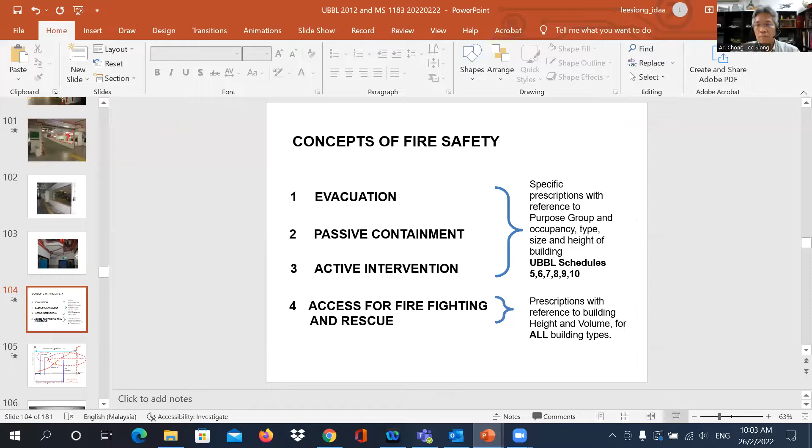Just to recap, when we did part one, we went through the four aspects of fire safety, namely evacuation, passive containment, and the third and the fourth aspect of fire safety on the basic concepts, which is active intervention and access for firefighting and rescue.

Again, to recap, we are referring to the UBBL, the Uniform Building Bylaws, as a basis for the contents of this seminar. I've always have to reiterate that the Uniform Building Bylaws, for all intents and purposes, is just a set of laws. It is not a document specifically written as a guiding document or as an educational document for us to use as a basis to figure out or learn how to design for fire safety. It is, for all intents and purposes, just a set of laws. It's called the bylaws. It's gazetted by the Act of Parliament, which means that if you don't do it according to the law, you're actually breaking the law. It's a criminal thing.

But having said that, it is near impossible for us to apply the laws if we do not know the fundamental reasons on how all the concepts, principles, figures and dimensions prescribed in the bylaw came about.

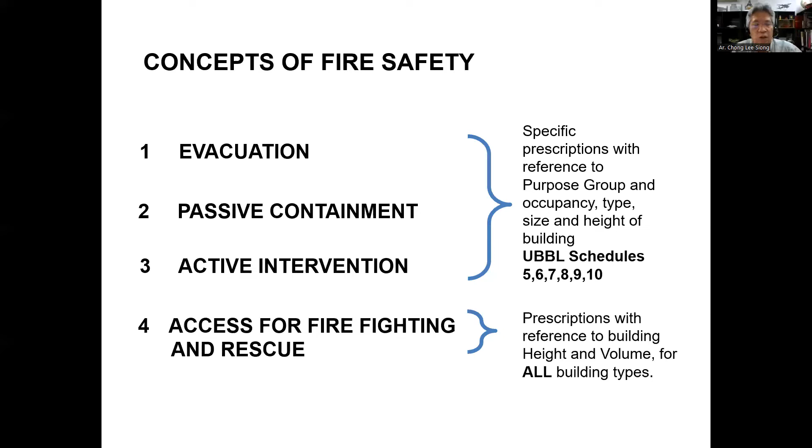So regardless of whether you're doing a residential or commercial building, just by reference to height and volume, the prescriptions for designing access for firefighting and rescue are the same for all building types, as opposed to the very specific prescriptions for different purpose groups and building types for evacuation, passive containment, and active intervention.

Again, to recap, when we're designing for fire safety, we have to first understand the nature of fire. As Sun Tzu said in the Art of War, in order to fight the war and fight your enemy, you must first know your enemy. So let's recap what the nature of fire is.

We've described this in part 1: fire starts with ignition, then you reach the condition known as untenable condition. This short time between ignition and when conditions become untenable is known as the available safe egress time. Conditions usually become untenable when the smoke layer comes down. So it's a very short period between ignition and untenable conditions—even well before the fire reaches full-blown flashover status, untenable conditions are reached very early.

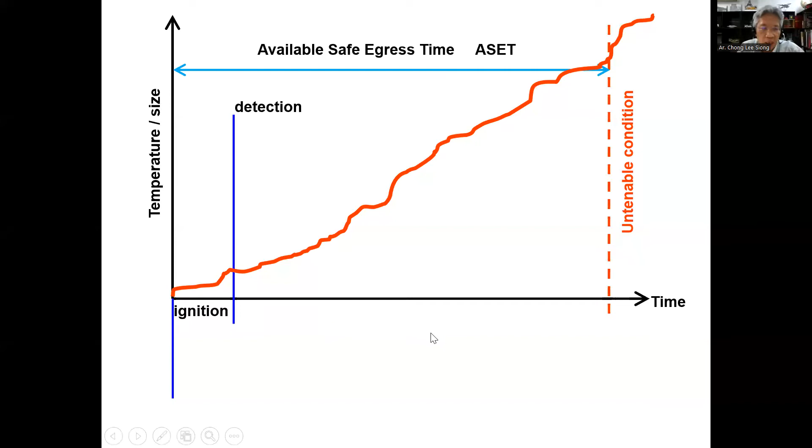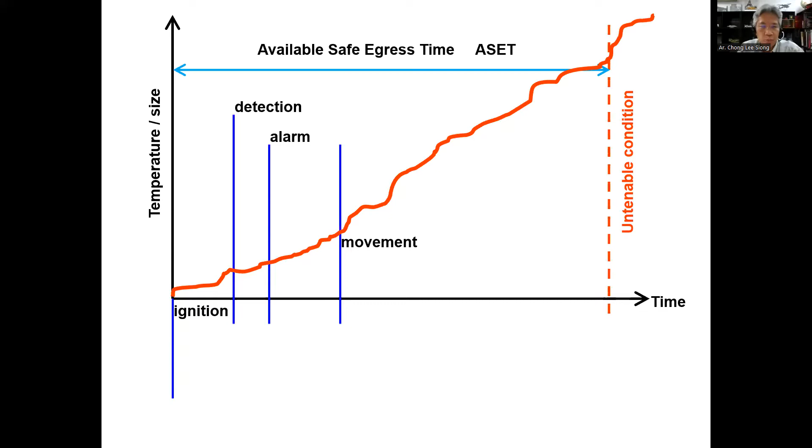In part 1 we also investigated the time delay taken for detection of the initial fire, the raising of the alarm, and the delay to actual recognition that it is a fire, leading to people starting to move and evacuate, and then total evacuation. The time taken from ignition of the fire to total evacuation of people is known as the required safe egress time.

We've also understood the factor of safety for design purposes is 0.75 of the ASET. So if you've got the available safe egress time from ignition to untenable conditions, you have to design the building to allow for total evacuation—detection, alarm, movement, and evacuation—within a required safe egress time, which should ideally be less than three-quarters of the available safe egress time.

Now coming to active equipment and active intervention, we are really looking first at detection and alarm—what mechanical and active systems allow us to facilitate or assist in detecting the fire and raising the alarm. Then the rest of it will be on active containment and extinguishment.

If you recall, the first three principles of designing for fire safety: the first is evacuation—design for evacuation, first priority is to evacuate the occupants. The second priority is to contain the fire in one location at one time. Thereafter comes active extinguishment and access for firefighting and rescue. So these two parts—detection and alarm, and active containment and extinguishment—are very, very important.

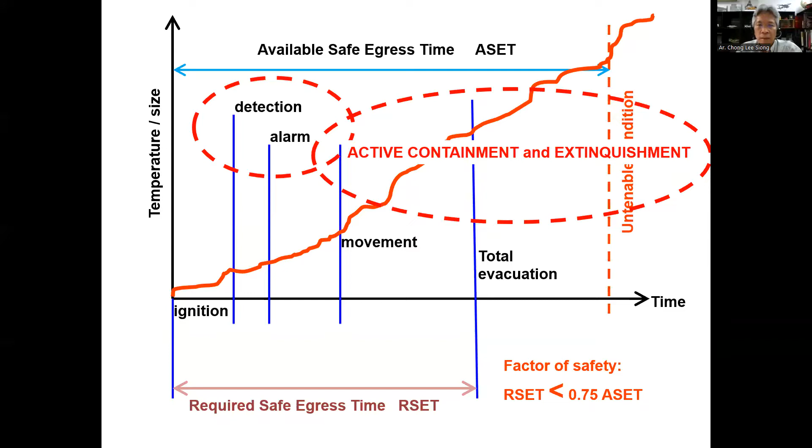I'll show this video again. We have seen this when we did part 1.

To recap, this is a recreation of a room from a nightclub fire somewhere in the US, many years ago. This nightclub fire was famous because it had a live performance, and all the revelers were packed into the nightclub. I think about 300 or 400 people were packed into a very small space. The live performance used pyrotechnics, and when the pyrotechnics went off as part of the performance, the fire started. When the fire started, a lot of people still thought it was part of the performance, since they were using pyrotechnics.

So when the ceiling started to catch fire, a lot of people thought that was part of the performance - wow, fantastic, a live performance with fire. Then the situation got bad very quickly. When people tried to evacuate the building, the bouncers at the gates were locking them to prevent people from leaving because they hadn't paid for their drinks. It was a disaster, really a very fatal situation. Not very good at all.

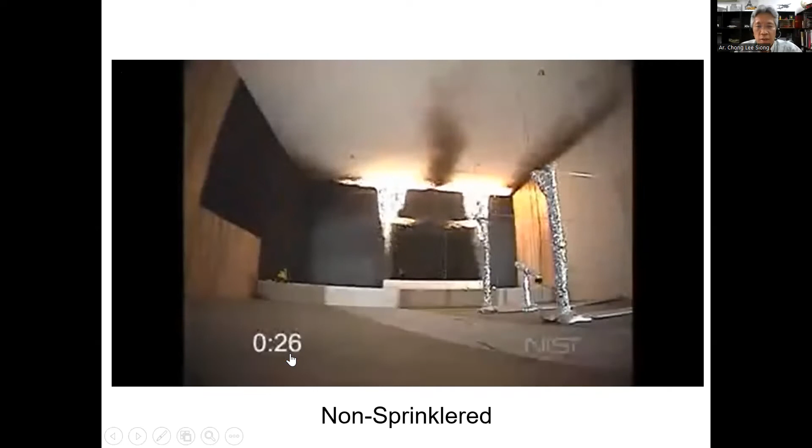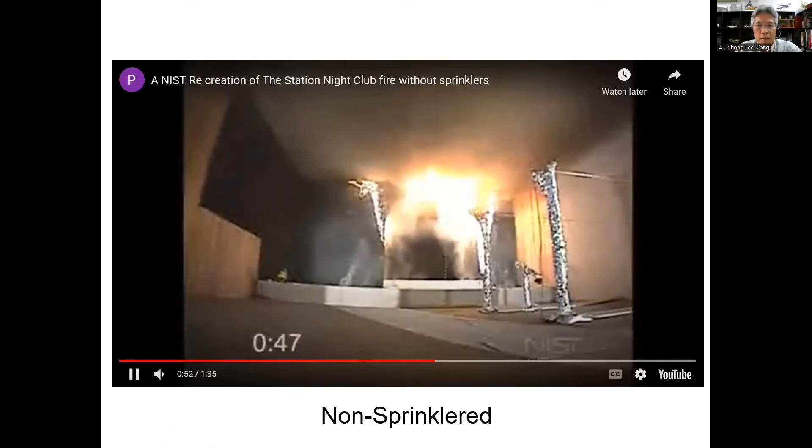At 12 seconds, the backdrop catches. At 24 seconds, the ceiling has caught fire and smoke is being developed now. At 35 seconds, the fire is well on its way. At 50 seconds, you'll find that superheated gas has already accumulated on the ceiling - look at the smoke layer now. At 1 minute, the superheated gases and the smoke are coming down now.

At just 1 minute and 13 seconds, flashover has occurred on the backstage, and the smoke has come down to less than 1 meter. At less than 1.5 minutes, the condition has become totally untenable. Flashover has occurred on the stage, and the smoke layer has come all the way down.

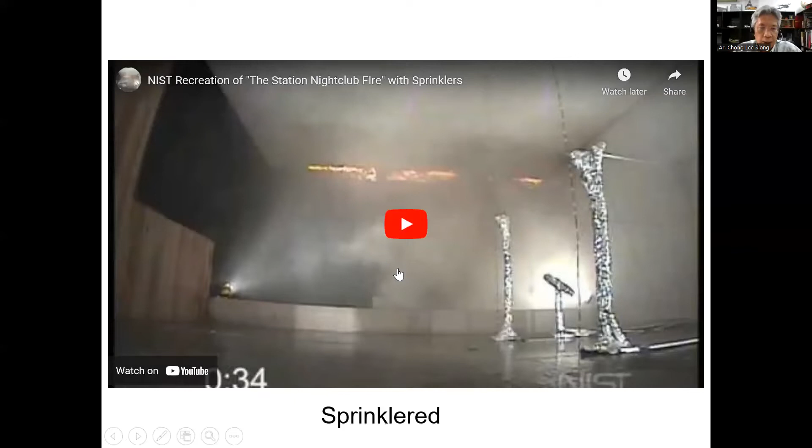Now let's look at this new scenario - a different scenario here. Again, it's exactly the same replication of the mock-up of the same room, but this time they have installed sprinklers. Let's look at the difference. Now with sprinklers, it's exactly the same scenario. Look at the time chart here.

The fire has started. In 10 seconds, the fire has reached the ceiling - it's caught hold. In 15 seconds, the ceiling has started burning. In 25 seconds, the smoke has started appearing. In 28 seconds, the sprinklers have kicked in and have deployed.

43 seconds, 44 seconds, 50 seconds, and 55 seconds. Now, if you compare to what happened in the first scenario, by this time - by 1 minute - the smoke layer was already coming down and flashover had already occurred. And in 1.5 minutes, without sprinklers, the place would have been totally untenable already.

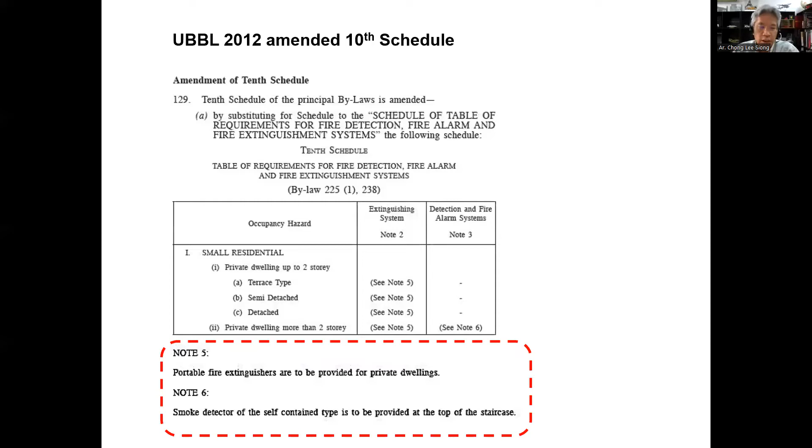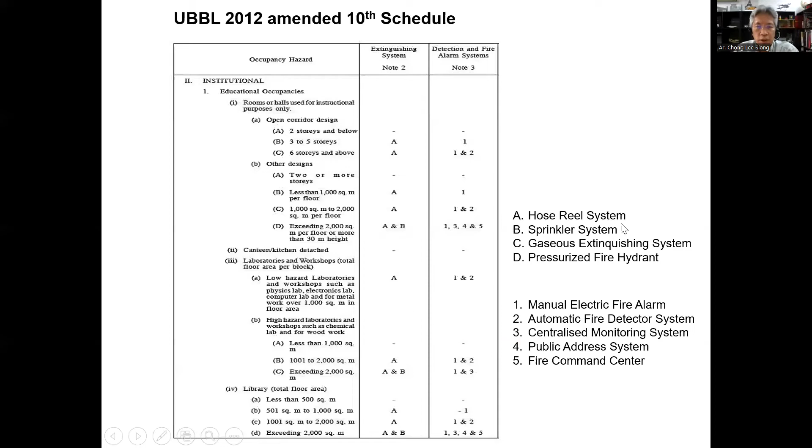Then when you go on to the other parts, there are a lot of refinements with regards to the thresholds as to when we will require the installation of hose reels, sprinklers, and alarms and detections. So a lot of these are very minute adjustments, but it just helps to enhance the basic requirements. And it leads us to this very important element over here.

Now we've got a very clear definition of what constitutes an open structure and what constitutes an open corridor. There has been all throughout our practice, as we have all realized, we've always said that, okay, if it's an open corridor or if it's an open structure, we don't need smoke evacuation and all that. Actually, that's not quite true.

The requirements for smoke and all that, I will describe it a bit later. It is governed under the UBBL with reference to the Malaysian standards, and that is very, very clear. Requirements of smoke evacuation or smoke control systems of some sort is dependent entirely on the floor areas and the volume of the building.

But however, when it comes to open structures and open corridors, there are certain very specific concessions. They're not waivers, but they are just concessions that recognize the fact that if you design a building as an open structure, or if you design the building with open corridors, a big degree of the risk has been mitigated. So therefore, you are allowed a certain leeway in terms of what active systems that you can install, right?

But first, let us evaluate what exactly makes up an open structure and what exactly makes up an open corridor. What does the definition actually say? Let's look at open corridors and open structures.

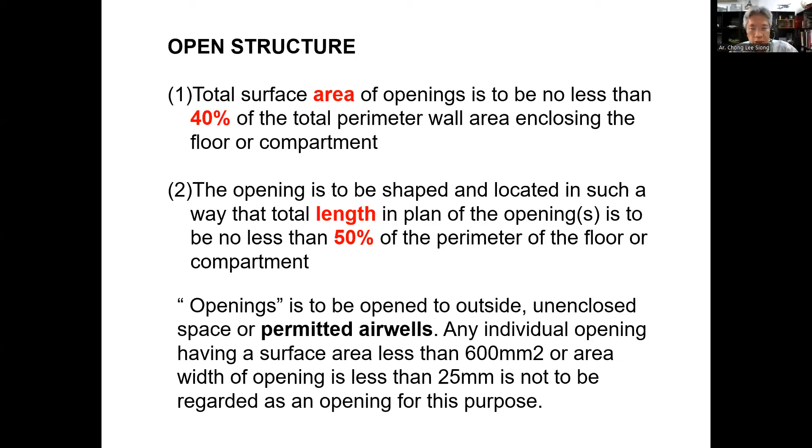Right, how do we apply this? Let's take a hypothetical example. You've got a building where the perimeter wall is 5 meters high, and the building is 25 meters by 50 meters, 25 meters wide, 50 meters in length. So the basic calculation: total perimeter length is 25 meters plus 50 meters, times 2, etc. That gives a total perimeter length of 150 meters.

So the minimum requirement is 50% for it to be an opening. We will need openings placed anywhere along the perimeter walls, with the total length of the openings to be no less than 75 meters, which is 50% of the perimeter.

So the total perimeter wall area is 150 meters by 5, which is 750 square meters. The minimum opening surface area, minimum 40%, is 300 square meters. This sets the benchmark: it shall not be less than 75 meters in length for the openings, and shall not be less than 300 square meters in terms of surface area.

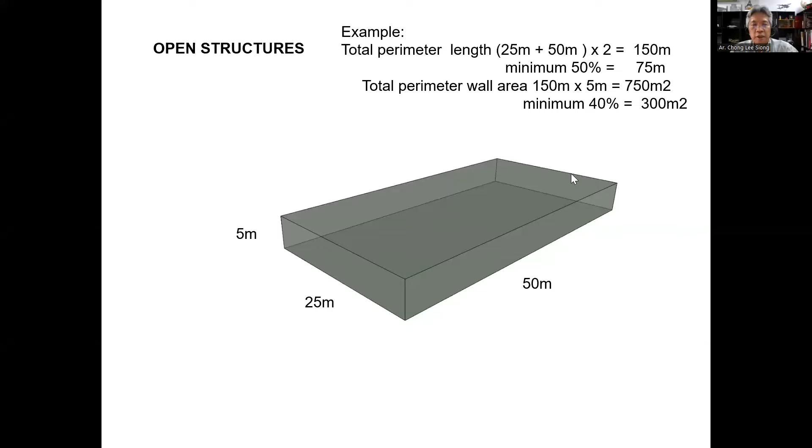So hypothetically, it can be this: 4 meters of height of opening, leaving a 1 meter span, across the 25 by 50 building, etc. This would be the bare minimum compliance for this structure to be regarded as an open structure.

Now, that is how bylaws are actually written. We can't write a bylaw to cover every scenario, so a bylaw is really just a law stating you cannot do less than this, you cannot do more than that. It's written in such a way that we've analyzed it to determine the absolute minimum scenario acceptable for this to be classified as an open structure.

By testing it this way, if someone places the openings for absolute minimum compliance as shown, we find that this structure can already be regarded as an open structure because it fulfilled the criteria of 40% opening.

So with openings placed here, you've got very big openings that give clear space for hot smoke to be dispersed out of the building. More importantly, the 50% perimeter length requirement allows you to create natural cross ventilation. If a fire starts here, the hot smoke will naturally move out to be dispersed from the building, while you get cold drafts or fresh air coming in to dilute the air inside, because you get cross ventilation even at the very minimum compliance.

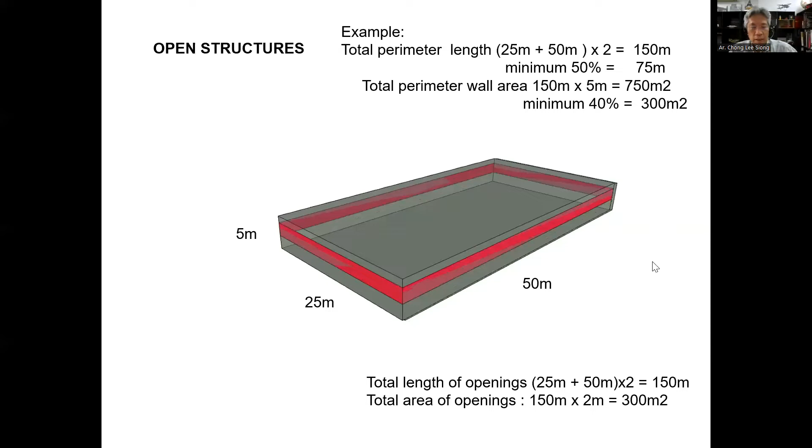Another scenario: if you make the openings even narrower, now you go down to an opening of just 2 meters. Fantastic. So the openings are now 2 meters, but by keeping the same surface area, now you've got the openings on the entire perimeter of the open structure. So this one definitely will also work.

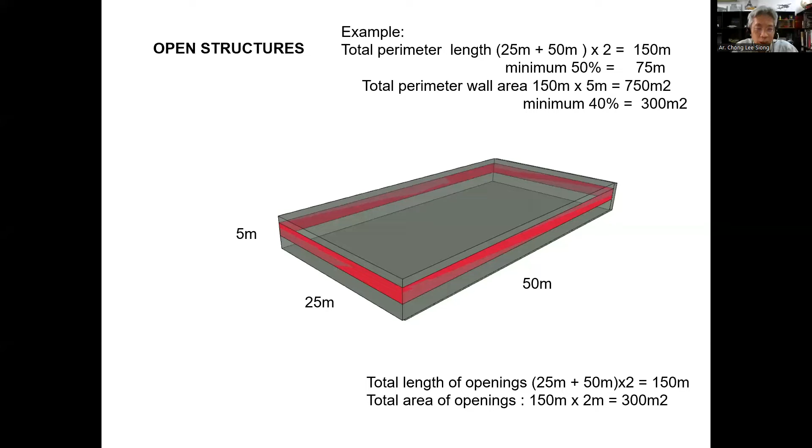This is how the bylaws are written. It just gives you the benchmarks for the minimum compliance. And with our creativity as architects, this is where we really dial it in. So it's not so much a case of us asking for waivers, saying can I do it this way or that way. No, it really is just understanding the very basic minimum compliance. Then from there, our creativity is what makes the building design work for this purpose.

Now let's look at a scenario of an open corridor. Exactly the same reference, the only difference is that for an open corridor, the total surface area of the opening is now no less than 25%. For the open structure it is 40%, but for an open corridor it is 25%.

Now why is that so? Well, we fully understand that if you're building a single loaded corridor apartment building, the corridor is only opening on one side, so it's not quite possible for you to have 40%, because the other half would be the apartments, the accommodation units themselves. So in recognition of that, the surface area of opening for an open corridor is reduced to 25%.

But this is also the minimum—please make it bigger whenever you can. This is the absolute minimum. The openings are to be shaped and located in such a way that the total length in plan is no less than 50%. This remains the same. The purpose of the 50%, as you recall, is so that at the very minimum compliance, you'll get cross ventilation over the floor area—in this case, over the floor area of the corridor.

And the same prescription applies as to what constitutes an opening. If you look at this example, this is a single loaded corridor. A very basic compliance is like that—if you can just have the full perimeter opening on one side of the corridor, you'll find that it complies very easily. So it's designed for that.

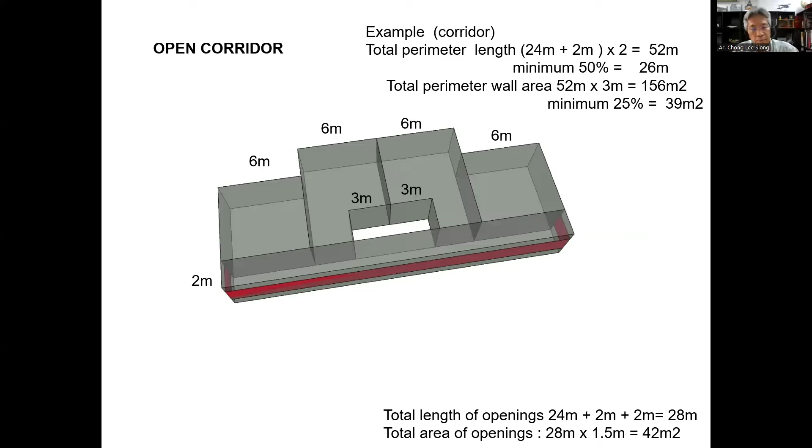Now what happens when you have double loaded corridors, like in a case like this? This is where the permitted air well thing comes in. We recognize that an air well designed in accordance with the minimum prescriptions of a permitted air well in the UBBL would function very well as part of the ventilation and cross ventilation, smoke dispersion for open corridors.

So the same principle applies: just ensure that the full openings comply with no less than 25%, and the way in which you position the openings would be more than 50% of the perimeter length of the corridor. Yeah, so it's exactly the same principle. And we find that this really helps us a lot.

Now, of course, having said that, it is not compulsory for us to design open structures, and it's not compulsory for all our corridors to be open corridors. This is purely a prescription. So what purpose would it be for us to go through the effort to design the corridor as an open corridor? What purpose would it be? What privilege is there for us to want to design an open structure in the first place?

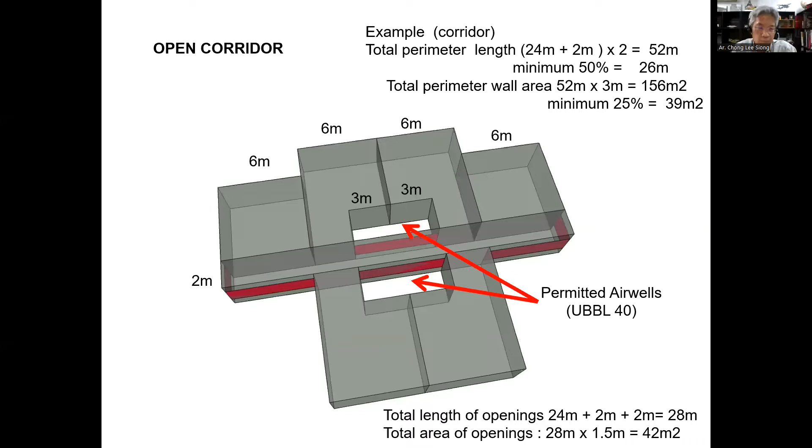Okay, this is where we come back to looking at the 10 schedule. It is all related to the mitigation of risk. What is the risk of a building?

We all know definitely if a building is an open structure, or the corridor is an open corridor, you have far less risk of a fire building up and for the space to be rendered untenable in the event of a fire and smoke build-up.

You can see from the first two videos that we've seen, if you've got the room fully enclosed and if there are no sprinklers and no active smoke control, the smoke build-up is extremely fast and the conditions become untenable in a very, very short time.

Whereas if you introduce sprinklers, you'll find that the generally untenable condition may not arise at all, if the sprinklers are active. And on the same token, if you have active smoke ventilation and smoke control in the area, the conditions may not be untenable at all because you already mitigated it with the active smoke control.

So all this links back to the provisions, or what we call the cut-off line, for us to then apply or install active provisions.

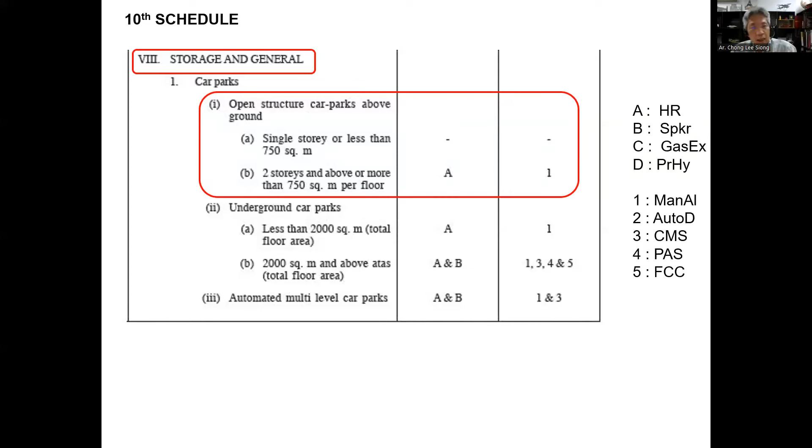I would say, yeah, definitely, because it's really not only about the cost, it's really just recognizing that an open structure for all intents and purposes does help to mitigate a lot of the risk.

Okay, let's look at other building types. Institutional applies to schools, hospitals, whatever. Let's look at educational occupancies.

Open corridor design, 6 stories and above, basically everything else - just basic hose-reel installations, no sprinklers required, 6 stories and above. You can design a super tall school building, and the minimum requirement is only hose reels.

If you don't comply with the open corridor design, you have to refer to other designs. For anything exceeding 2,000 square meters per floor or more than 30 meters in height, you will need sprinklers already, and the full complement of detection and automated systems. Now, if you look at hotels, this is probably where it really comes in.

Under an open corridor design, sprinklers come in when you reach 50 rooms per block, 6 to 10 stories - when you have more than 50 rooms per block, or anything more than 11 stories, you'll need sprinklers. For the open corridor design, sprinklers kick in when you have more than 50 rooms per block, or your hotel building is 11 stories or more.

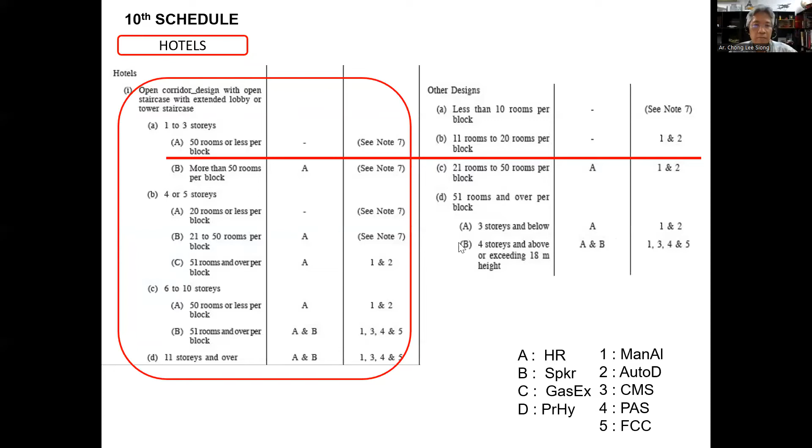Likewise, apartments and flats - find the open corridor design. Apartments exceeding 10 stories or 30 meters, basically any apartment of any size or height, you don't go beyond just having a manual alarm.

But once you have an internal staircase or core design, that means no more open corridors. It's still not requiring sprinklers yet, as far as UBBL 2012. We've just finished the UBBL 2021, which has just been gazetted. These elements have been refined a bit more, but that's a different story. For now, let's just stick to this.

You'll find that if you do not have an open corridor design, you will need a full complement of automatic detection systems and a full fire command center for your apartment building, if it doesn't qualify as an open corridor design. Fairly minimal when it comes to apartments, but these are things to take note of.

Okay, that brings us to smoke control. Just give me a second.

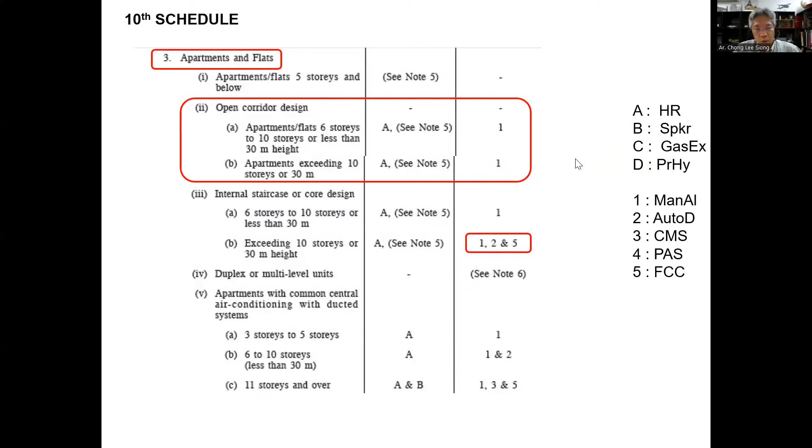But however, smoke control is defined and made as a standard in MS 1780. So UBBL 2012 just refers us to MS 1780.

And this is where it says MS 1780 2017 applications cover basement smoke control systems - smoke vents for areas below 1,000 square meters, and smoke control systems for areas exceeding 1,000 square meters for basement smoke control systems.

So basically what it means is that when you're in the basement, you will need smoke control. If the areas are below 1,000 square meters, you may use natural smoke vents for that purpose. Anything beyond that, you'll have to do your calculations and your engineering for the active smoke control system.

An active smoke control system may also be naturally induced, right? But you have to support it with the calculations, etc.

And how do you get away from these? If your basement can be made as an open structure, yeah, that means you have open cuts all round, and you make your basement comply as an open structure. Then they will be referring to a smoke vent or a smoke control system via natural means. You just have to prove it when you come to your design.

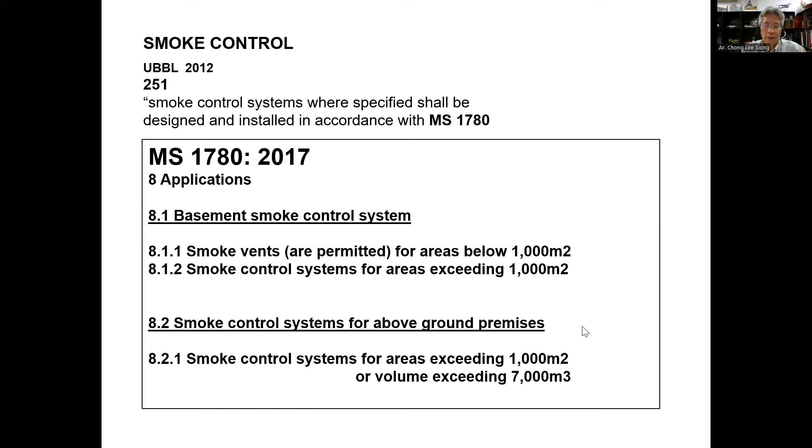Smoke control of hotel guestroom corridors. Where internal guestroom corridors are not mechanically pressurized, such corridors shall be smoke purged or diluted at the rate of no less than 10 air changes per hour. Natural ventilation is permissible only if induced cross ventilation is available.

So this is where, again, the open corridor thing comes in. All internal guestroom corridors shall be mechanically pressurized, or you have a smoke control system in one way or another where the smoke can be purged or diluted at no less than 10 air changes per hour. Once you have 10 air changes per hour, that means it has to be something mechanically induced or mechanically extracted to be able to quantify this minimum in the event of a fire.

Natural ventilation is permissible only if induced cross ventilation is available. This is where you dial it into your design of your open corridor for the cross ventilation. And if you have mechanical inducement via either forcing air in, or the more effective way, which is to extract the smoke from one end, then you allow natural air to flow in via the openings that you created in your open corridor.

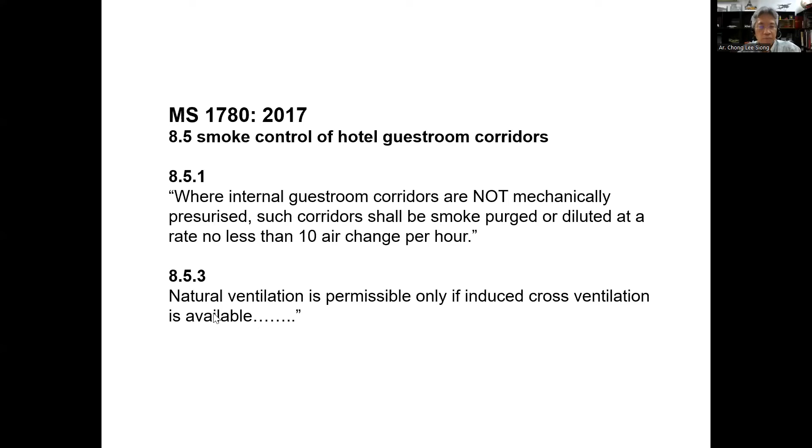So these ones you work it with your engineers together in terms of the system. But generally what it means is that if you design open corridors and it complies with the openings and the cross ventilation requirements, you'll find that it would do for smoke control.

Protection of stairs and lobbies. Smoke lobbies, protected lobbies, ventilation of stairs, firefighting lobbies, etc. Protection of stairs and lobbies - these are the very, very basic provisions in the bylaw when we do our design.

It's important because once we start designing as the architects, where we position the stairs, how we position the firefighting access lifts and all that, firefighting access lobbies and firemen's lift comes fully into play. Once we start designing that, that becomes the core of our building. So we have to get that right from the first day.

The prescriptions are such that a protected lobby is a lobby separated or isolated from fire and smoke infiltration. That means it's a lobby which is protected, deliberately designed to protect it against the possibility of fire or smoke infiltration into the lobby. And that's called a protected lobby.

A smoke lobby is similar to a protected lobby, but it is really primarily to isolate staircases from smoke infiltration, as opposed to a protected lobby, which refers to a protected structure, i.e. fire-rated compartmentation. A smoke lobby is primarily to isolate staircases from smoke infiltration.

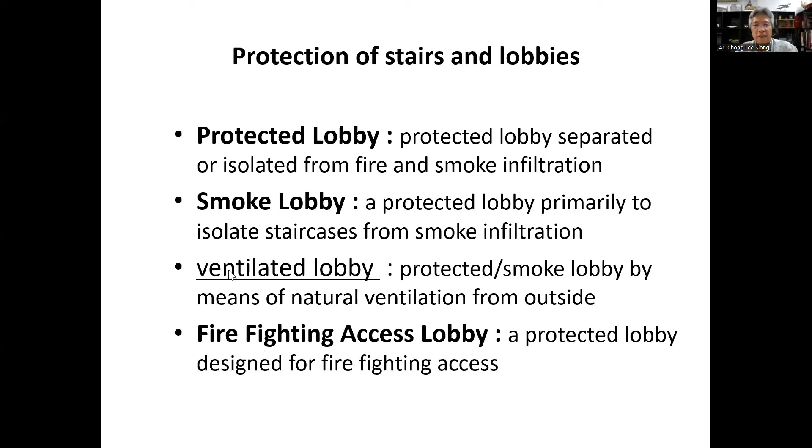A firefighting access lobby is a protected lobby. First and foremost, it is a protected lobby designed specifically for firefighting access. That would be called a firefighting access lobby. So the protected lobby and the smoke lobby are the two requirements. Ventilated lobby is only referring to the means, one of the means of designing the lobby, for it to be protected or for it to be a smoke lobby. And a firefighting access lobby is a specific requirement that has to be of a protected nature, which can also be protected via a ventilated lobby. That's a firefighting access lobby.

Protected lobby requirement for buildings. First requirement will be anything above 18 meters. This 18 meters corresponds to your requirement for the installation of risers, which also corresponds to the requirement for firefighting access lobbies, which then also corresponds to your requirement for your fireman's lift and the firefighting staircase. In other words, the 18 meters building height is the kickoff point for us to install the vertical firefighting shaft for internal firefighting. 18 meters just kicks it off, everything from there. So the protected lobby requirement also kicks off at 18 meters to correspond with all of that.

So you have an internal core here or a staircase here. Once it reaches 18 meters, you'll need a protected lobby requirement here. For stairs that are opening straight onto the outside, that means this shaft is a fully naturally ventilated shaft, then you do not need a protected lobby. As long as that stair, that protected shaft, is fully naturally ventilated on the outside, then you do not require a protected lobby.

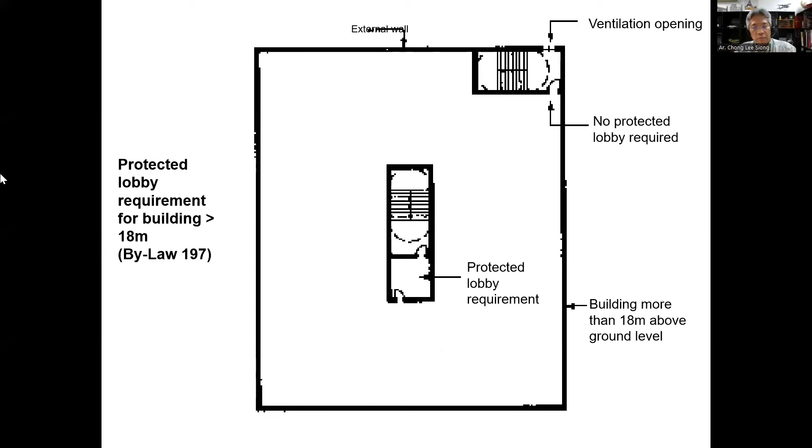Next level up. If your building is below 45 meters, once it's above 18 meters, you require a protected lobby. Up to 45 meters, this protected lobby may be replaced by purely pressurizing the shaft. So you do not require a protected lobby if you have actually just pressurized the shaft for buildings below 45 meters, mechanical pressurization. And then for the stairs that's open to the external, naturally ventilated, nothing happens because you can get away with it. You still don't require any further protection.

And if you go beyond 45 meters, for buildings beyond 45 meters, you must have a protected lobby, and the protected lobby must be protected via pressurization. And again, for the stair that is naturally open to the outside, that gets full natural ventilation, you don't need anything else. That one can stay as it is.

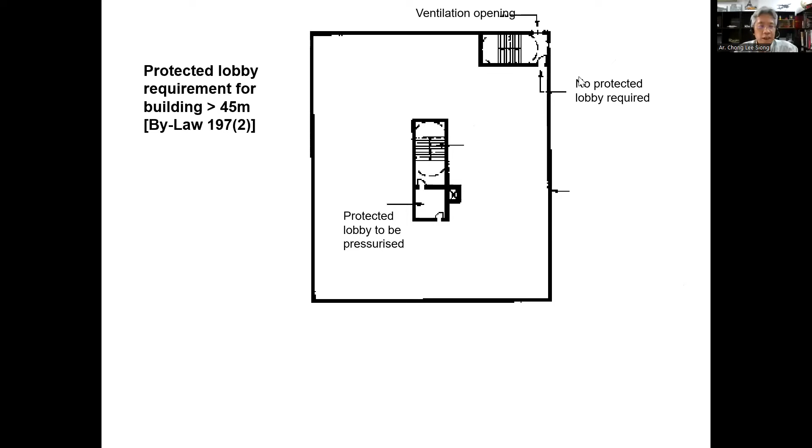So the summary is that if above 18 meters, your internal shafts will need protection. If it's a shaft that can get full natural ventilation over the entire height, that's the protection. If it's the internal shaft that doesn't have natural ventilation, then you need the protection of either a protected lobby, or you actually have to pressurize the shaft. If it is above 45 meters, you can't just pressurize the shaft, you must have the lobby, and the lobby itself must also be protected by pressurization.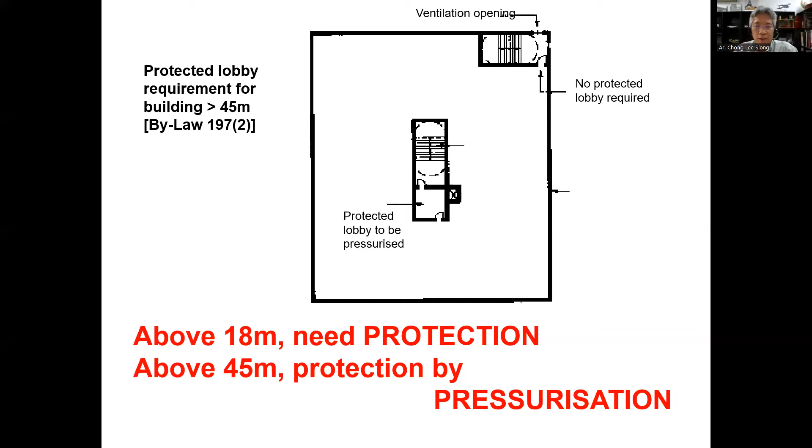Okay, that is just the bar. But if the shaft is naturally ventilated, nothing happens over the entire height. You can actually build a building 100 meters, 200 meters, super tall skyscrapers. If you have a shaft that's actually open to the outside, you don't need any protection per se. So that's one. This one again tells us of the importance of natural ventilation. Open corridor, open stairs, and all that. Really, if you can just open up to the atmosphere, we have taken away a huge chunk of the risk of fire.

Okay, now let's look at firefighting, access, and rescue. Let me just look at some of the questions first to see if there's anything that I will need to come back to.

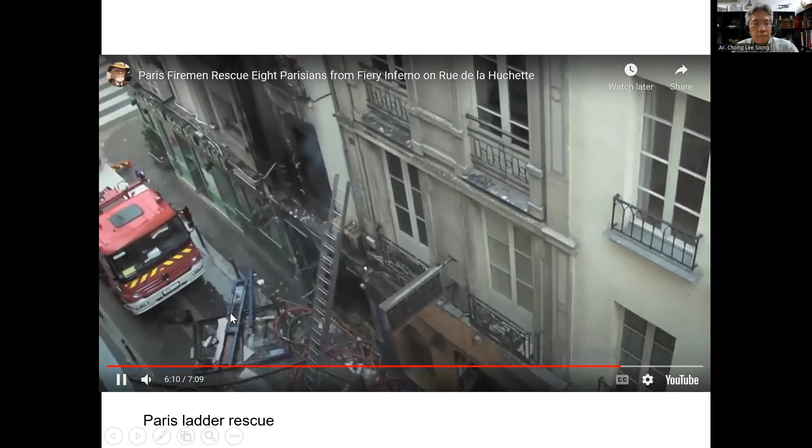Well, nobody died apparently - we were very lucky. No one died, and the fireman's up there now trying to cool down the fire from the roof. Nobody had severe injuries or death in this incident, so we're all very thankful for that.

I just look again at the kind of activity and look at all this debris. There are lots of debris falling from the upper part, from the smoke and from the consumption, the burning of the awnings, the burning of the canopies and the awnings from the boulangerie downstairs. Right, yeah, okay, so this is the situation.

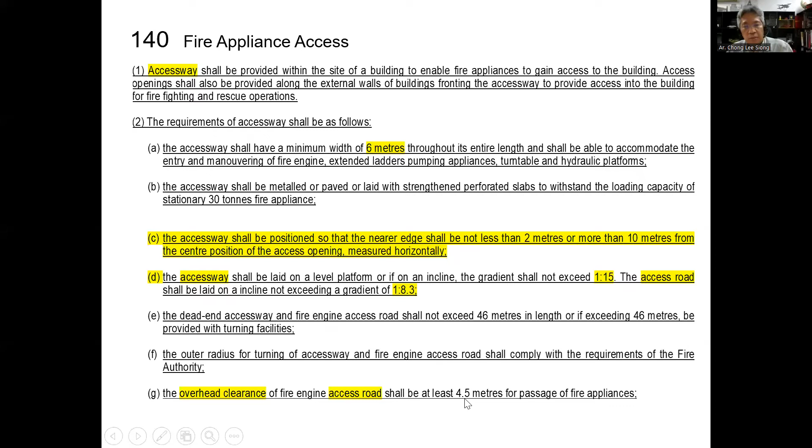Access way - the dead end overhead clearance shall be at least 4.5 meters, etc. So all these are quite self-explanatory. Okay, then...

Clause 197A: the designing of access way shall be read in conjunction with the requirements of means of firefighting for buildings over 18 meters. We know any building over 18 meters kicks in the requirement of firefighting shafts, which means firefighting access lobbies, fireman's lift, firefighting access lobbies, fireman's staircase, and most importantly, the installation of the risers - we call it the internal hydrants.

Fire appliance access way, by definition, is an area for the entry, maneuvering, and parking of fire appliances during firefighting and rescue operations. That is an access way - when we require an access way, this is what it means. I will term the access way as really the car park for fire appliances.

When we design a car park, what are we designing for? We demarcate the car parking bay, but we also have to design the entire driveway, the ramps, the maneuvering, and everything to get the cars to enter the car parking bay where they actually park. So I take the access way as the car parking bay, and everything you have to do to lead the fire appliances to the access way shall be known as the access road. Access road is a road capable of accommodating the passage of fire appliances to enter an access way.

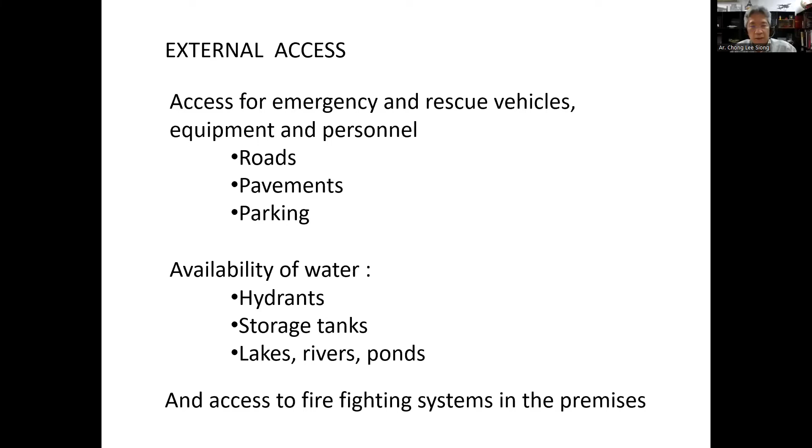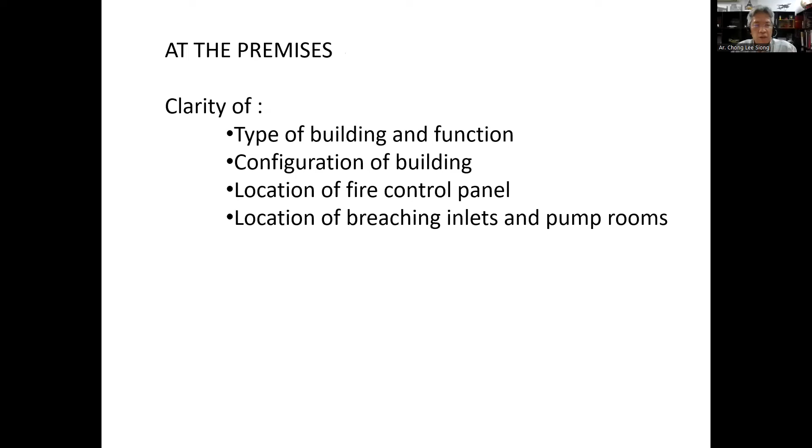When the fireman arrives at the premises, the clarity of the type of building and function, configuration, location of the fire control panel, location of breaching inlets, and all that must be very clear, or at least visible to the firemen. And access into the building via protected passages, protected stairs, fireman's lift, firefighting lobbies - look at the access systems available on the site first.

Let's look at pressurized hydrant systems. This is primarily installed in factories and standalone industrial complexes. We have the hydrants, then the storage tanks for the stored water - the initial water to feed the systems. We need pumps, of course, for it to be pressurized to get the water from the tanks into the system, and we need the breaching inlets.

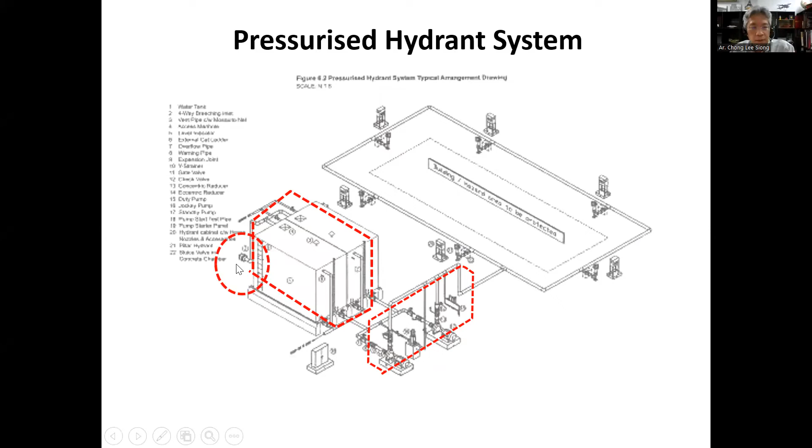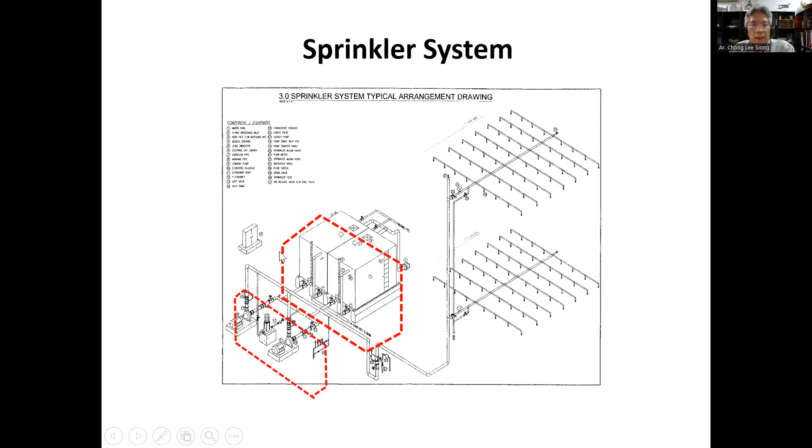There's a breaching inlet over there. Look at the sprinkler system, much the same. You got the sprinkler system, these are the actual sprinkler outlets. You need a storage tank, the big tank for the initial water, the bulk water for the sprinkler system. You need the pumps to get the water into the sprinklers, to pressurize it, to get it into the right flow. And we have a breaching inlet in the system.

A dry riser system, dry by virtue of it being dry, means it doesn't have its own storage tanks, and no storage tanks, no water, no pumps. Yeah, but at least it's got the breaching inlet for you to be able to connect water into the system.

Then the wet riser system. So wet riser is exactly the same as the dry riser, except that because it's wet, it's got its own tanks. And with the tanks comes its pumps, and there's a breaching inlet over there.

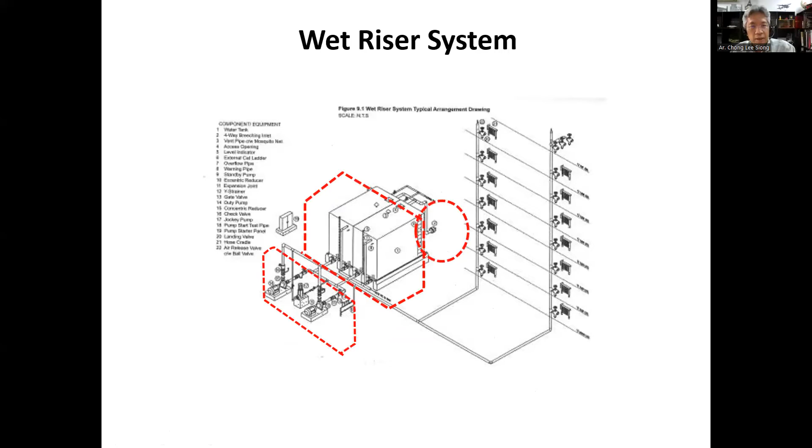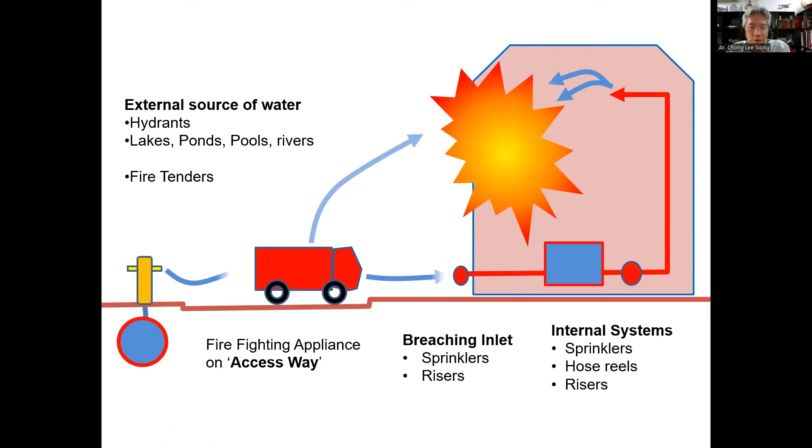So the importance of the accessway is very, very important, and the relationship on how you place the accessway is this: we have to be able to connect hydrants to the fire appliances, to the breaching inlets, or to access the immediate facade of the building.

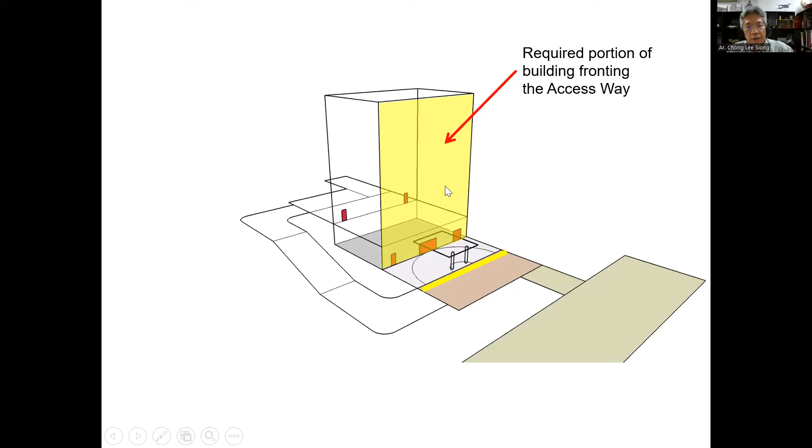If this is the required portion fronting the accessway, like say for example this building requires one-quarter of the frontage, that would be the required length for you to front the building, and this would be the facade which is fronting the accessway.

So the accessway, minimum 6 meters width, absolute minimum. Please make it as wide as you can, but that's the absolute minimum. Minimum 30 tons load, gradient not steeper than 1:15, and no overhead obstructions whatsoever for an accessway.

No overhead obstructions. Access road minimum width, I'm suggesting at least 4.5 meters. But of course, access road is literally anything—any way in which you can get a fireman into the accessway will be fine. But firemen do have to drive very fast, so the last thing they want is to be slowed down by a very narrow road or very high curbs, where they have to slow down and maneuver the vehicles in. Just make things wide and clear so firemen can arrive at the accessway in the shortest possible time.

Gradient no more than 1:8.3, with minimum overhead clearances. For access roads, you can cross through gateways, overhead pedestrian bridges, overhead cables and wires and things like that. Just ensure that the path you're designing for firemen to get to the accessway has overhead clearances not less than 4.5 meters. Very important—sometimes they miss it. Things like even a single stray overhead telephone cable or a one-phase power cable someone just extended can be very dangerous. We just don't notice it, so it's very important to keep a clear eye out for these overhead clearances.

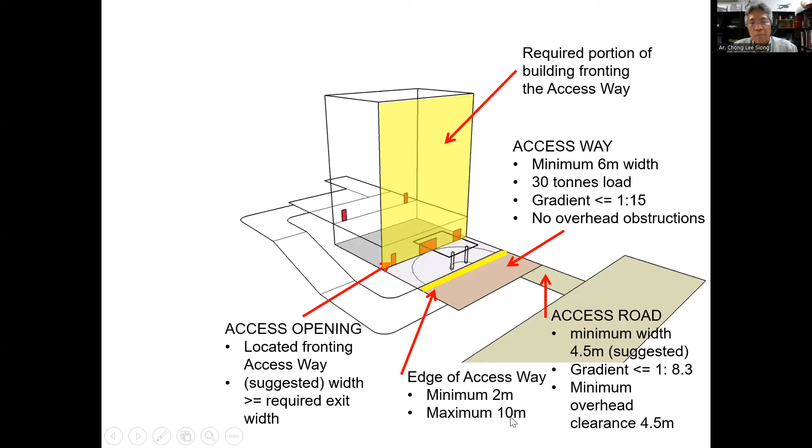And the edge of the accessway—the physical edge or a demarcated edge from which you start measuring the width of the accessway—shall not be less than 2 meters to the face of the access opening, and cannot be more than 10 meters away from the face of the opening.

If you require another portion of the building to have a front accessway, like in this example, you repeat the same process wherever that portion is, and the connecting accessways shall then be the access road again. So these will be the required accessways, and all these will be access roads to connect the accessways. The access roads need not be designed as an accessway if it's not required, but the accessway that's required will have to be designed as an accessway. Again, it's a bit like the car park arrangement.

Car parking bays have a minimum size and dimensions. So where you demarcate the car parking bay is where you mark the car park and say that's a car park. Then you have to design access roads, ramps, and everything else to bring the vehicles to the car park. That's exactly the same concept.

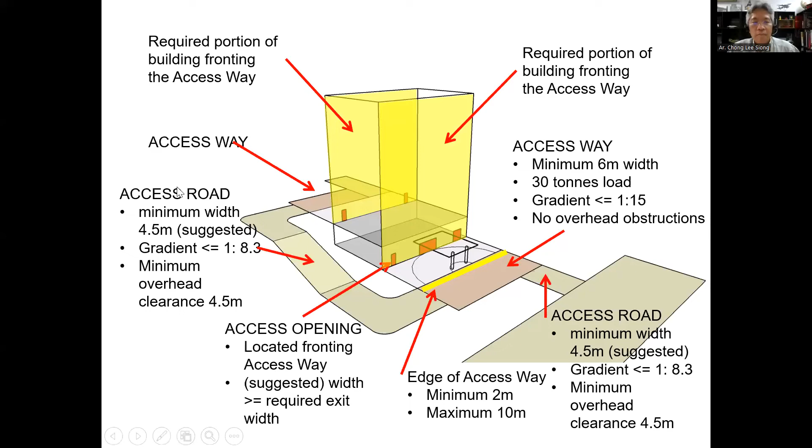A bit more details on this. When you arrive at the scene, in terms of the physical building design, the accessway will be there. So what are the other immediate things that will be required to be accessible from the accessway? Because the accessway, as we know, is a place for the parking of fire appliances and for the firemen to conduct their staging and all the necessary activities for fighting the fire. So the more complicated the building, the more things there are to coordinate.

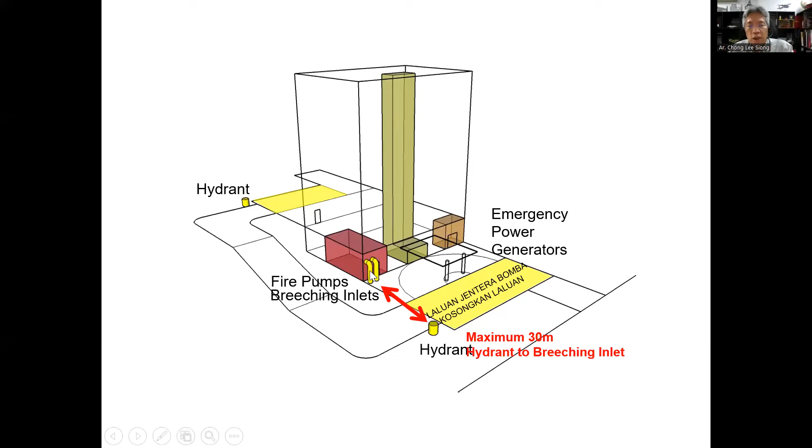In a building where you have a requirement for the firefighting shaft, naturally you already have the pumps and the tanks for all your internal systems. That's where the breaching inlets come in. The requirement is that the breaching inlets shall not be more than 30 meters away from the nearest hydrant. There are hydrants everywhere, but there has to be at least one hydrant no more than 30 meters away from the breaching inlet.

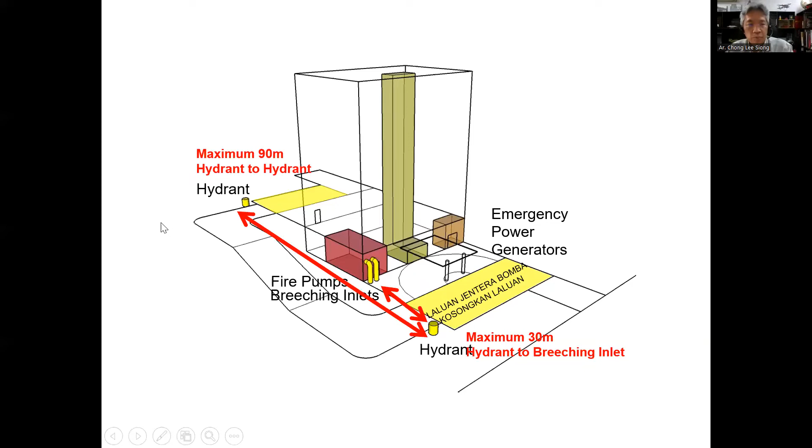And hydrants to hydrants, of course, we know is not more than 90 meters. There must be an access opening fronting the accessway, and then there'll be the firefighting shaft. This relationship is very, very important. This will be the barest minimum of a relationship between the external hydrants and the internal systems.

Let's recap in terms of designing for the firefighting accessway. We know it's by volume. Any buildings above 7,000 cubic meters to 28,000, one sixth of the perimeter of the building shall be the minimum dimension. The minimum dimension of the accessway shall be no less than one sixth of the building once your building volume exceeds 7,000 cubic meters, and so on and so forth.

We'll find that you reach an island access, meaning your whole building's full perimeter will have to be accessed by an accessway once you reach 112,000 cubic meters and above, the island site.

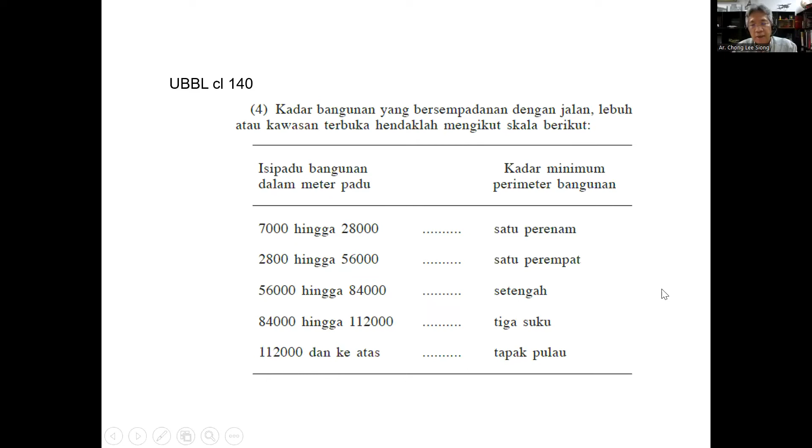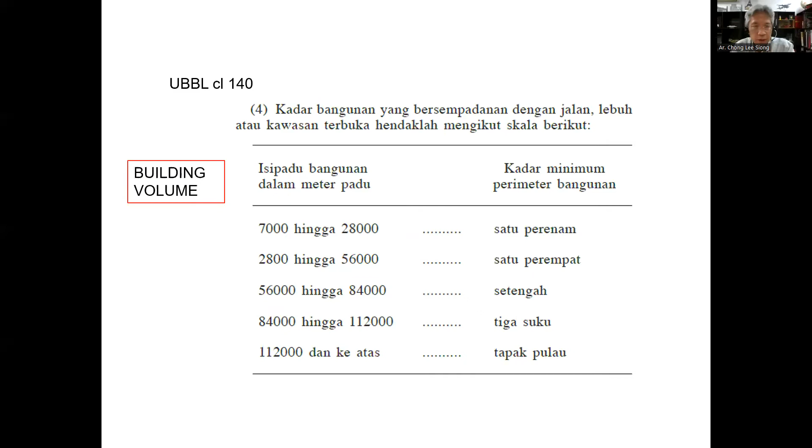So our local UBBL, when it comes to accessway, is still referring solely to the building volume. We have not made any concessions yet at this point in time with regards to the proportions of the building. We're just going solely by the building volume. What I'm going to show you next is purely an illustration of what that actually means, and by our understanding of it, how do we then apply our full architectural design prowess to ensure that our provisions and design of an accessway meets the actual practical requirements of an accessway.

Let's look at this example here. These are building volumes, let's say 30 meters by 30 by 30, so that's 27,000 cubic meters. According to the chart, we require one sixth of the perimeter to be fronting the accessway. So that's the one sixth of the perimeter. The yellow is the accessway, and the access road leads to an accessway. So the required accessway will be this proportion, this little one sixth here.

If you have to double the building to 60 meters high, that's double the volume. This building is now double the volume of that example. The bylaw says we need one quarter of the perimeter to be accessway. So if this is one sixth, this is a square plan, so one quarter is this extra little bit over here. So the accessway minimum requirement is now one quarter of the perimeter over there.

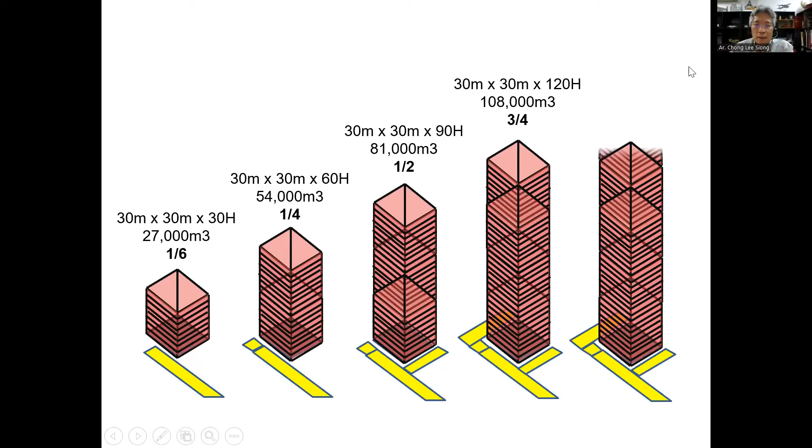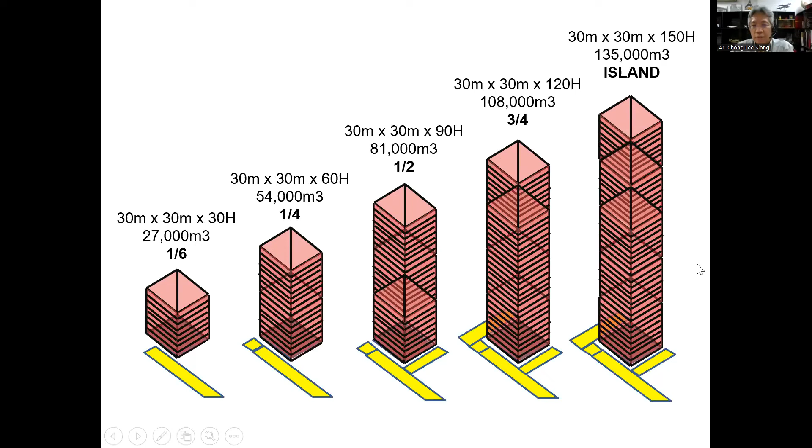If we go even higher, 150 meters high, we are now at 135,000 cubic meters, so this becomes an island site.

If you analyze this situation and do the accessway in the manner we've shown, this building actually complies with the basic requirements of the UBBL. You can't dispute that. But if you look at exactly what the purpose of an accessway is, we may not exactly be fulfilling the actual practical requirements of an accessway, or designing in the most efficient manner for it to fully function.

Take the example of this building. It's 30 meters high, so there's about 8 to 10 floors at most - a fairly low-rise building. It's buildings like this that firemen would be fighting the fire from the outside. No doubt at 30 meters you already have internal risers, but if there's a fire breaking out from the outside, firemen need to park on the outside.

Like the example we saw just now, there may be situations where firemen need to rescue people from the outside. So if the fire burns on that part of the building which is not covered by the accessway, the firefighting activities may not necessarily work for a fire breaking out on that side. Firemen will actually still have to enter the building and sort things out from the inside using the internal risers.

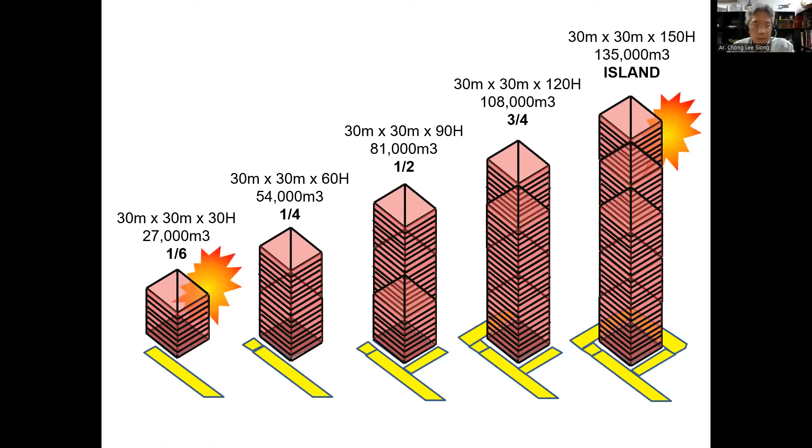The risers, in order to fight the fire from the inside. So what I'm saying is this: our current bylaw just goes by volume. It's prescriptive. So yeah, we do have to at least comply with the minimum requirements, but it may not necessarily be fulfilling, or the most efficient or appropriate way of doing it.

Just to give you another example, using exactly the same analogy - we have a building like this, and this is the analogy of us going up. So there's 1/6 of the perimeter, and this one is 1/4 of the perimeter. If we put the building low-rise like this, the building is long, and this one has exactly the same volume as that building. This one also requires 1/6.

So the 1/6 is obviously longer because there's more perimeter, but you can fulfill the 1/6 by doing that. For a building of this volume, if you stack it up high, you've got a quarter of the perimeter access over here. But for this building, if you stack it up that way, this building has the same volume as that, and the requirement for perimeter access remains at 1/4. So what is 1/4? It is just that.

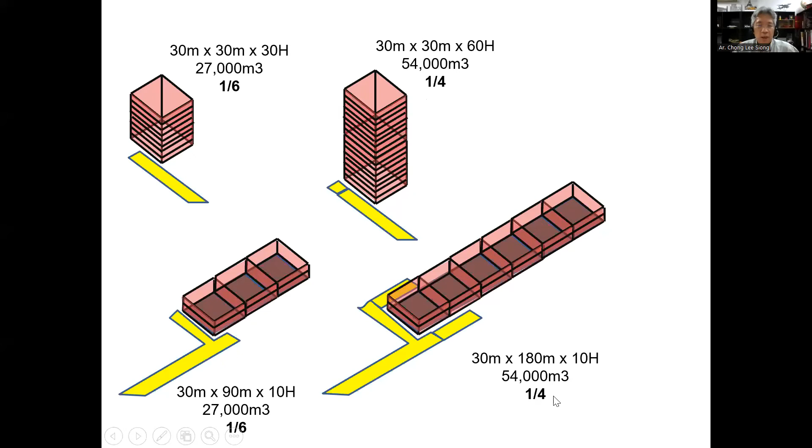So you've got a building that long - by prescription, by doing the perimeter access at 1/4 just surrounding here, you've met that requirement. But if a fire is to burn out at that corner, you'll find that the fireman is really too far to access it. And worse, at least with a high rise, we have the internal firefighting shafts.

So firemen are able to go in there. There are internal risers, firemen's lifts, and the firefighting access lobbies and all that for firemen to fight the fire from the inside. For a building like this that is low rise, there are no internal hydrants.

There are no internal firefighting shafts. All you have are hose reels in there and probably sprinklers. For firemen, they park the fire engines over here, but they can't reach that space.

No doubt you have complied to the bare minimum, 1/4 of the perimeter to have a fire appliance access. So just minimum prescriptive compliance does not necessarily mean performance compliance. Just remember that, because it's very important when we design our buildings. We have to recognize that.

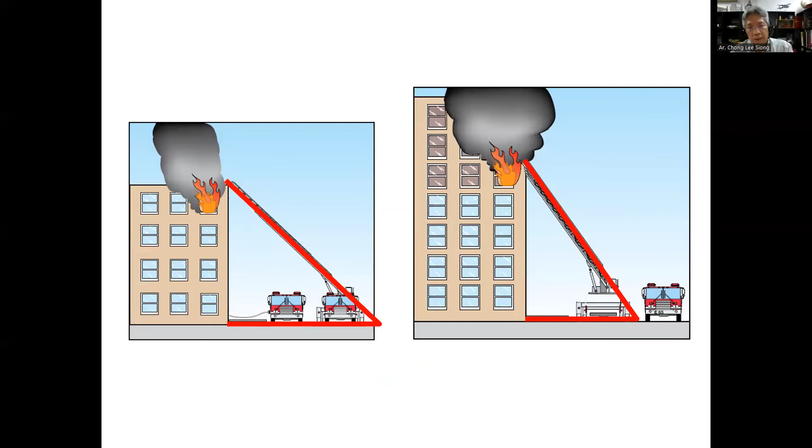Now let me just introduce you very quickly to the Singapore Fire Code. I'm not saying that we want to impose the Singapore Fire Code, but just reading it will help us understand a little bit more. The Singapore Fire Code, in terms of fire appliance access, has requirements based on the volume of the building, but for certain building types, they've also got requirements based on the floor plate surface area. A proportion of perimeter access determined by floor plate area instead of solely by the volume of the building.

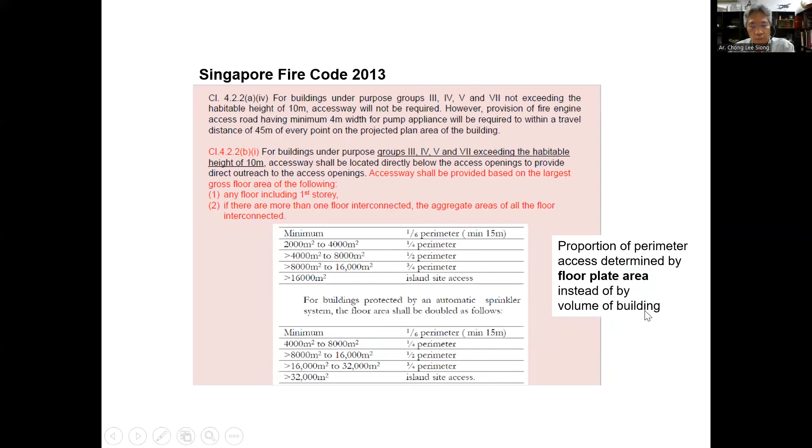For example, this is for buildings in purpose groups 3, 4, 5, and 7, exceeding the habitable height of 10 meters. The access way is no longer just based on the volume of the building, but also on the floor plate. So for example, a floor plate of 4,000 to 8,000 square meters requires half the perimeter for fire appliance access.

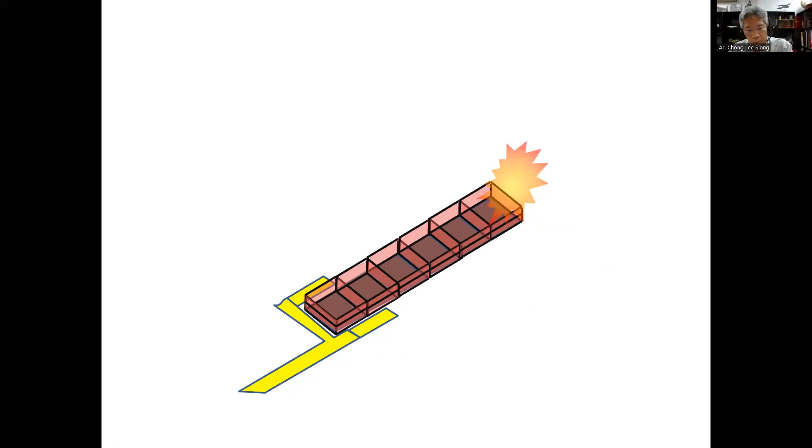This is the Singapore Fire Code. I'm just using this as an illustration for us to understand. So in the scenario just now when I was mentioning, if there's a fire over there, if you're using building volume, this is the minimum perimeter access that will comply with the bylaw. You design it this way and Bomba will have to give you approval, unless they come in and study it further and impose something else. But this one complies with the bare basic prescriptions of the bylaw by volume.

But if you look at the Singapore code by floor area, 30 meters by 180 meters, that's 5,400 square meters. If you go by building volume, 54,000 cubic meters, we require only 1/4 of the perimeter for fire appliance access. But if you go by floor area, same building configuration, you require half. And half means we will have to do that - that is half. So this gives a far more practical frontage of access ways relative to the shape, size, and configuration of the building.

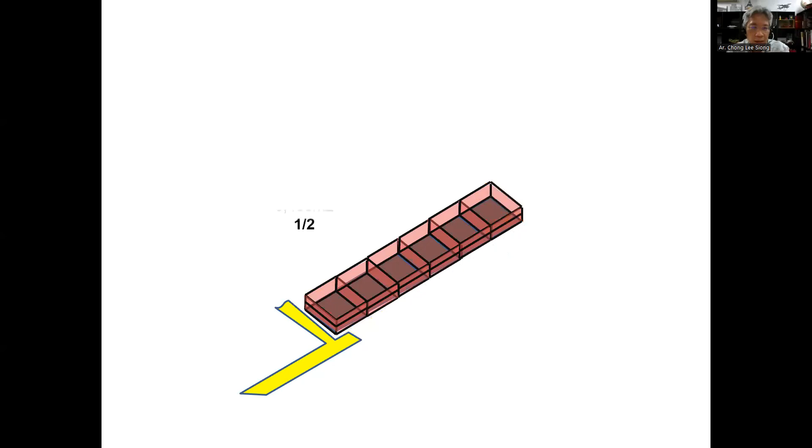And in recognition also that a building of this nature may not necessarily be equipped with internal firefighting shafts, you do have to fight the fire from the outside in a lot of cases. See the big difference between that and that. This is just one illustration - you'll find that different buildings have got so many different configurations.

So what I'm really saying here is this: we now understand the basic purpose and the basic requirements that led to the minimum prescriptions enshrined into our local bylaw. So when we design a building, rather than just aiming for the absolute minimum prescriptive compliance with the bylaw, with our understanding we are in a far better position to design the building to be even safer for our local Bomba guys to help us in the event of a fire.

And this helps us a lot in our liaison with Bomba. Very often we hear people saying, oh, we want Bomba to waive this requirement, we want Bomba to waive that requirement because we think this is excessive or what. But really, I think the whole intention is not for us to ask Bomba to waive this or that, but for us to go to Bomba and say, look, this is the way we're designing the building. Our configuration is unique in this particular situation.

In this situation, just complying with the minimum bylaw does not quite work in that direction. Instead, let me compensate by doing something greater to allow you to fight the fire from here. We are then in a far better position to genuinely offer a firefighting concept that is unique to the building we are designing.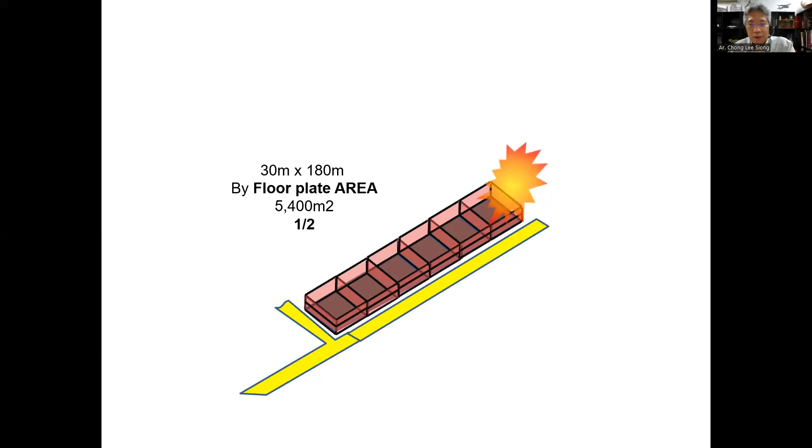I hope this helps bring clarity to our bylaws and prescriptions. Applying performance criteria to check our prescriptive codes can often lead to far better design. Bomba will really appreciate this, because we are going over and beyond mere compliance with the minimum prescriptions. We are actively looking for ways to make things a lot safer.

It is with all this work that we can accumulate, put together, consolidate, and this becomes the advancement. Hopefully, once we have studied and understood these things, they can be incorporated into new revisions of the bylaws in the not too distant future, because that's what our work is all about - continuous improvement over the years through our experience.

Okay, so the last thing to cap it off is how we apply firefighting shafts, primarily for high-rise buildings. We know 18 meters is the cutoff, the threshold. Once you cross 18 meters, the introduction of firefighting shafts comes in.

It's not only the building height, it's also the building below the ground. The threshold of buildings below the ground requiring firefighting shafts is 9 meters. So remember, it's 18 meters above ground, 9 meters below ground.

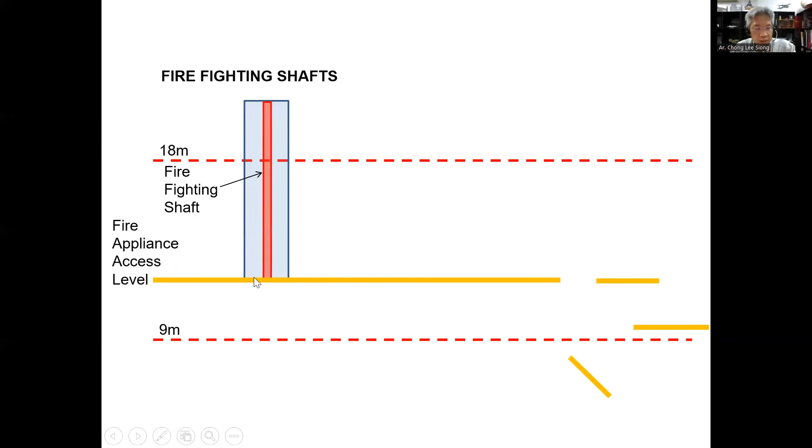A building that's higher than 18 meters needs a firefighting shaft all the way from the fire appliance access level to serve the topmost occupied floor.

For a building that has a basement, but if the basement is not more than 9 meters down into the ground, you need protected stairs, protected shafts, protected access shafts for exits and also for fireman access, but you do not need to bring the facilities of the firefighting shaft down to the basement if it's less than 9 meters.

If the building is shorter than 18 meters, but for some reason it's deeper than 9 meters below ground, you do have to provide a firefighting access shaft from the appliance access level down to the lowest level of the basement. But you do not need the firefighting access shaft to serve the upper floors if they are less than 18 meters from the fire appliance access level.

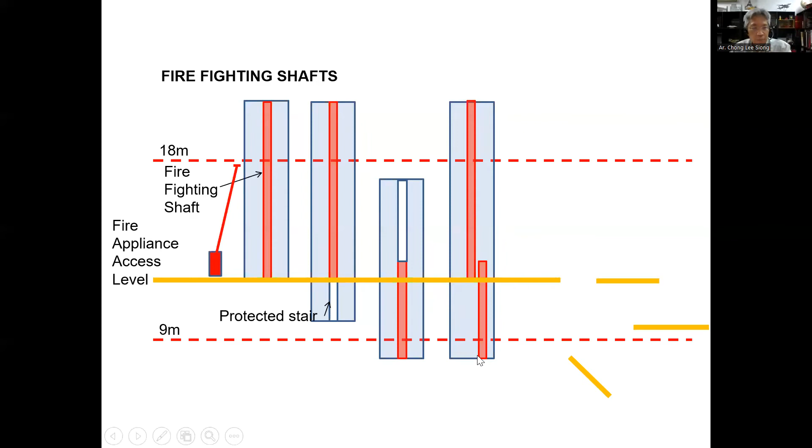And of course, if you've got a building that's taller than 18 meters and deeper than 9 meters, you will need a firefighting shaft all the way down. But there has to be a crossover - at the fire appliance access level there must be 2 separate shafts, a crossover. We do not mix the same shaft together from the basement all the way to the top. There has to be a crossover here.

And if you've got different levels of fire appliance access, say a half kind of level, you will need things like that. So from the firefighting access level, there's an interchange - I won't call it crossover, it's an interchange - at the main fire appliance access level, one shaft goes up and the other shaft goes down.

If you have 2 levels of firefighting access, we can do it this way - that becomes a single shaft because there's no below ground in this sense. The fire appliance access will be at 2 levels - fire appliance access from that level and from that level. Then this can be one continuous single shaft to serve the entire length of the building.

So this definition will help us a lot as a basic diagrammatic concept in how we configure our buildings.

Evacuation of separate route - okay, this is quite redundant. In terms of risers, just the location of risers corresponds again with the location of the firefighting shaft. We have to refer to 2 different documents, both the UBBL and the Malaysian standards, to correlate it. There are no contradictions. A lot of times when we read the different numbers, we find that even within the UBBL itself it appears to contradict, but actually there are no contradictions - it is purely about what the particular clause is referring to.

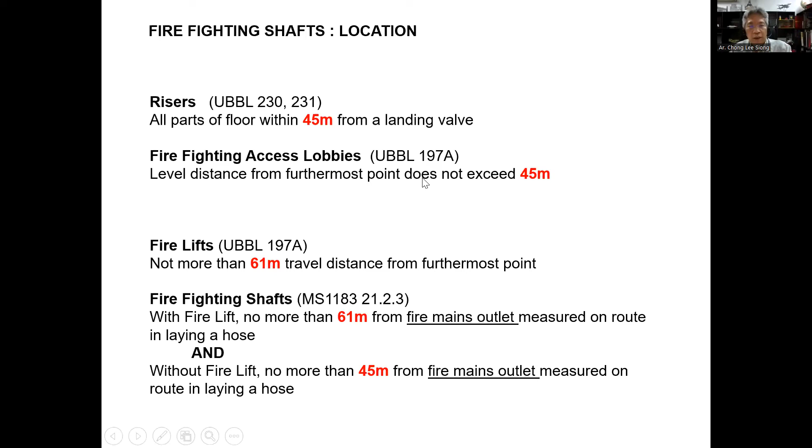So it appears quite consistent here, but one is actually referring to the FFAL, the other one is referring to the riser landing valve. This one is radial distance from the point of the landing valve and from the point which is the entrance to the firefighting access lobby, the protected entry to the FFAL.

Then the requirement for fire lift. Fire lift is not more than 61 meters travel distance from the furthermost point. And the firefighting shaft itself. So all these items are actually all together.

You've got the risers. A riser is just a single pipe with a landing valve to be located within the firefighting access lobby. And a firefighting access lobby must be accessible to a fire lift. All of these things are actually located inside a single firefighting shaft.

The location here, firefighting shaft, is under Malaysian Standards 1183. With a fire lift, a firefighting shaft with a fire lift, that is, must be no more than 61 meters from fire mains outlet, measured on the route in laying a hose. This fire mains outlet refers to the landing valve.

So, oh, there you go. Yikes, is there a contradiction? And for a firefighting shaft that hasn't got a firefighting lift - okay, I know some of you are now asking, but I thought you just said all firefighting access lobbies, firefighting shaft must have a fire lift. Okay, not quite, let me describe it a bit later.

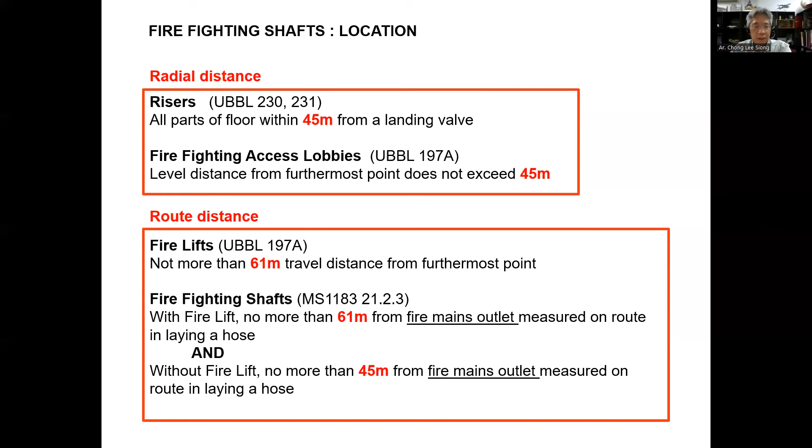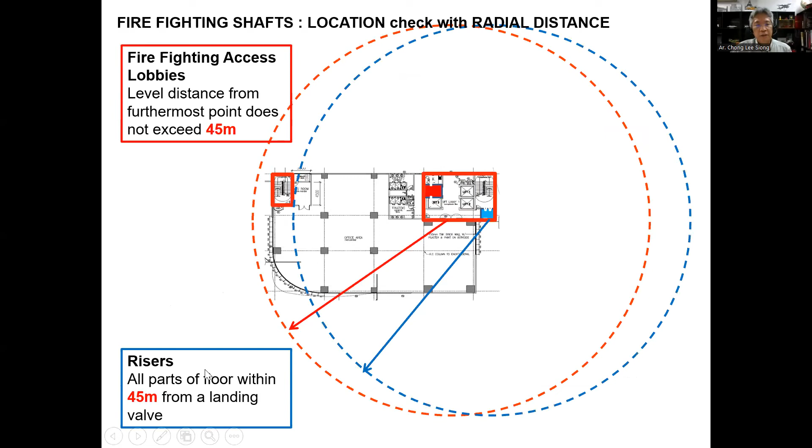Second check, the landing valve, risers - all parts of the floor within 45 meters radial distance from a landing valve. Oh whoops, if we do this one, we find that this part of the floor does not comply. It's missing. Of course you would be saying, oh it's very easy, all we have to do is move the riser across to this side and it will comply, right?

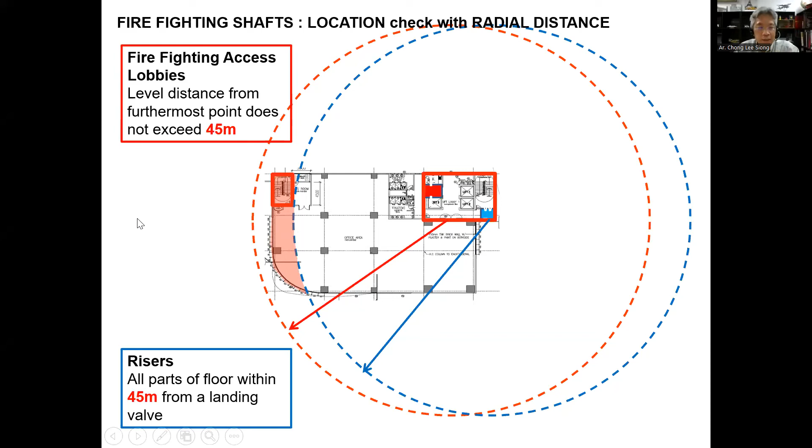Yeah, of course it does. We are just using this as an illustration of what happens when this happens, right? But really, the easiest way to solve this one is move the riser to this side and then you will comply. Okay, but let's say that the situation is like this. So the next check would be this.

So then the next question you have to ask, if the fire mains within 61 meters also - fire mains will be a different location from a fire lift. You don't install a fire mains exactly in a fire lift.

You can't do that. So ask yourself again the question. If the answer is no, then you can install a fire mains in a secondary protected stair, which is within 45 meters. So you don't have to add a firefighting access lobby. First, if the lift complies, then you don't need to add a firefighting access lobby.

Then you look at the fire mains. If the fire mains doesn't comply, then you can add in a fire mains only in the secondary protected stair. So this secondary protected stair will be the secondary firefighting access lobby that will not have a fire lift. But if the fire lift cannot cover the distance, then yes, you must have a second fire lift. And when you have a second fire lift, it means you need a full-fledged firefighting access lobby. So this is a very simple cross-check.

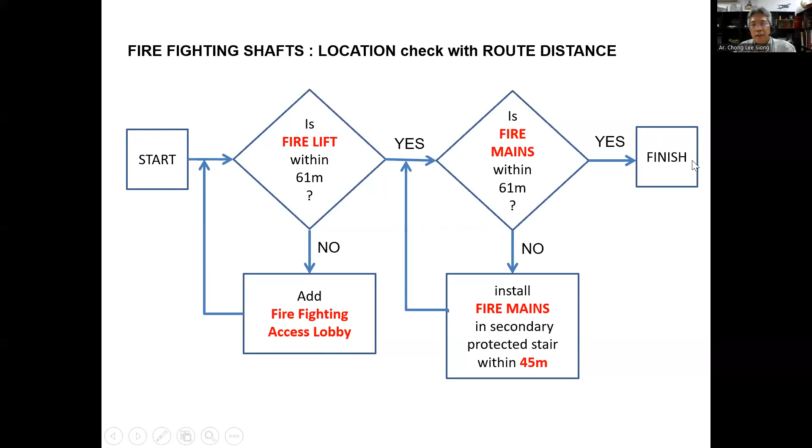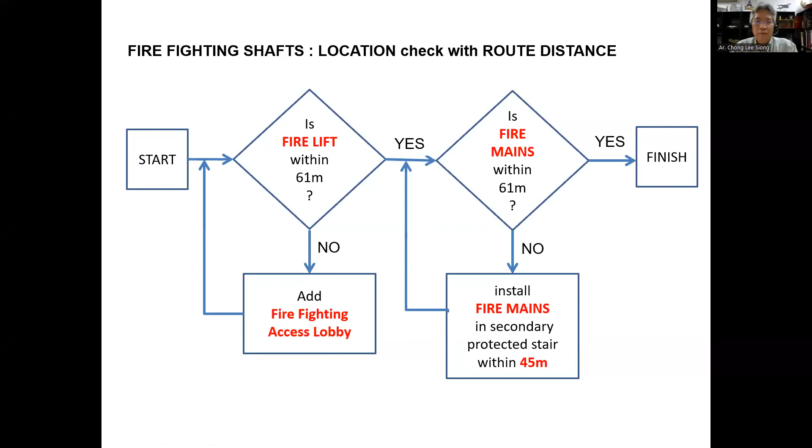And of course, if all of these answers yes eventually, if you install the fire mains here, yes, and yes, okay, then you're finished. Then you finish your design already. So there's no contradiction between the prescriptions in the UBBL and the prescriptions in the MS 1163, in the fire lift, fire mains, and the firefighting access lobby. No contradictions. It is just this prescription only that we need to understand. Okay, I think we'll quickly wrap up now.

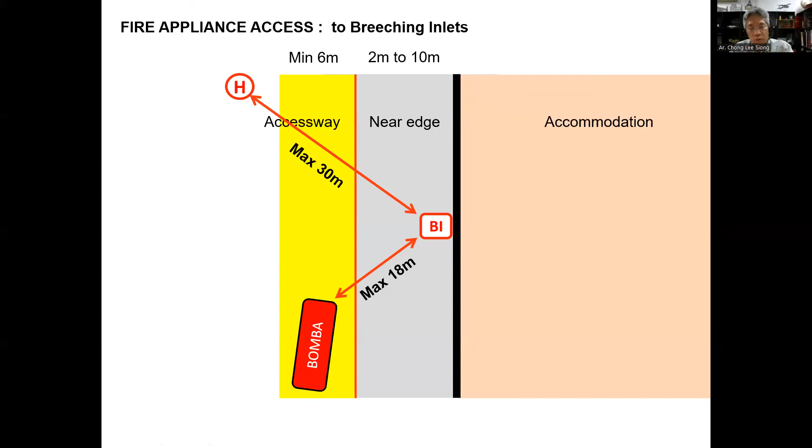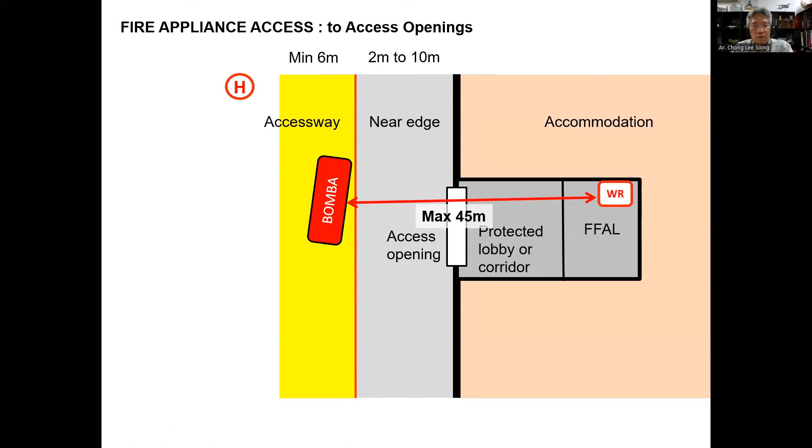Where a building is equipped with a firefighting lobby, i.e. if there's a wet riser, then the relationship will be like this, where the fire truck shall be allowed to be parked in a position on the access way that the fire appliance access will be no more than 45 meters away from the riser, from the landing valve, the first landing valve at the ground floor, no more than 45 meters away. And maximum 30 meters. Sorry, I'm going backwards.

And where a building has got no internal firefighting shafts, say it's a single-story building or a low-rise building but with very, very deep floors, the configuration shall be such: access opening shall be located in a manner that you should be able to get maximum 40-meter direct radial distance to any part of the accommodation, or maximum 60 meters route distance to any part of the accommodation. And again, the relationship between the access opening and the hydrant shall be this: maximum 18 meters to the nearest point in which the Bomba can park, and maximum 30 meters wherever the Bomba is parked in that position, within the appliance access, the fire engine is within 30 meters to the nearest hydrant. So that's the general configuration.

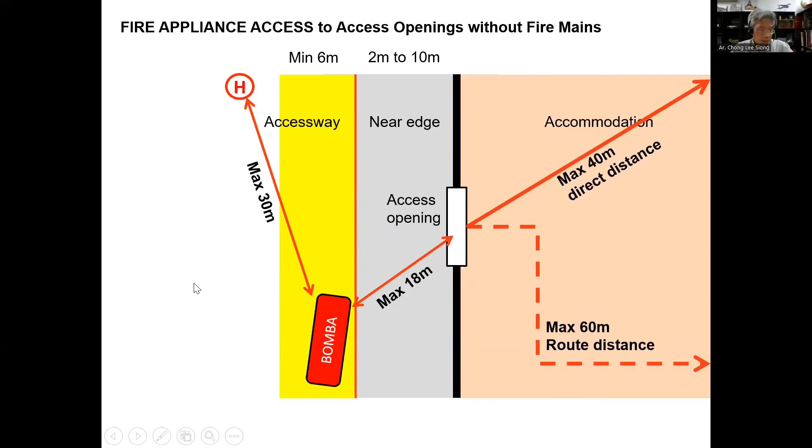And if we wrap all of that up, we should be well on our way to proper compliance with Bomba requirements. Okay, I think I would stop here. Thank you very much. I'll hand it back to you, Justin.